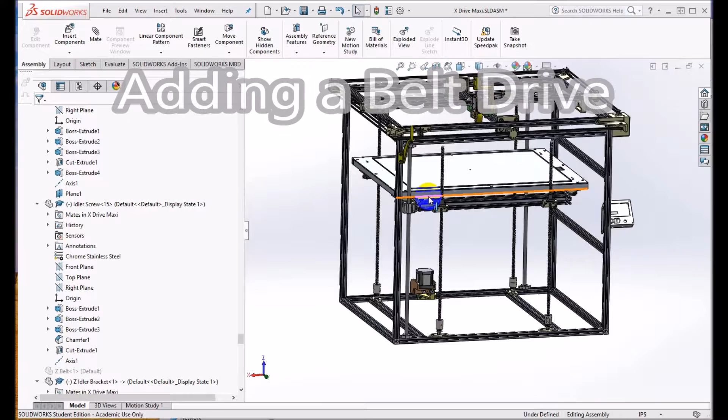In this video I'll be demonstrating how to add a belt, like a timing belt, to an existing machine. This happens to be a 3D printer. The method I'll be showing is applicable both to chains and belts. Alright, so let's get started.

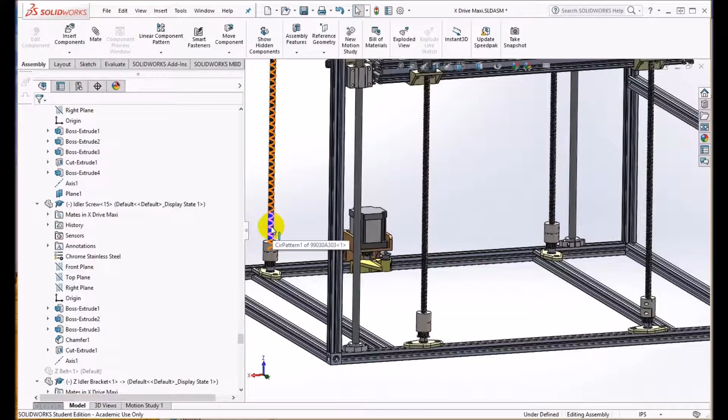I have a series of pulleys, each one at the base of a lead screw. Got 1, 2, 3, 4. Plus I have a motor and a tensioning idler. Formerly, when I wanted to add a belt using a very manual method, I would create a sketch. I would convert entities out to each pulley, do tangent lines and so on. It was a long drawn out process and not particularly easy.

Thanks to Paul Gwinnett, the TA in our junior projects class, I've become aware of this very nice feature. I'm not sure when it came into SOLIDWORKS, but it is there now in the 2016 version. So let's go ahead. I'm going to create a belt, a timing belt, that traverses this entire path, and then you'll see how I can adjust the length. I can measure the length, I can move the tensioner and have it automatically compensate.

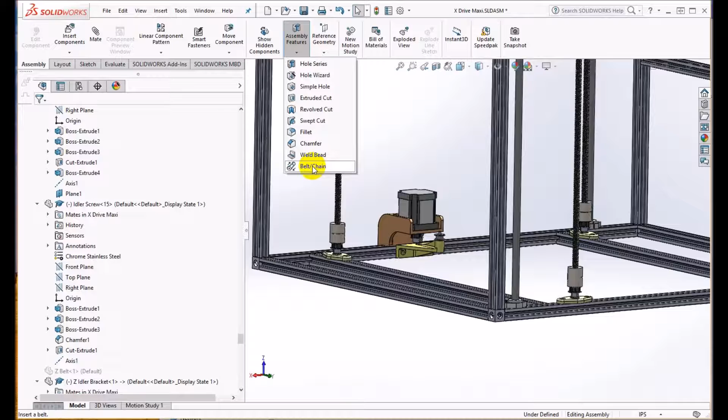So it's an assembly feature. So up on the menu bar you'll see assembly features. Go down to the bottom where it says belt and chain. And now it's wanting me to add what it calls belt members. In this context that means the pulleys. So I'm going to go to the first pulley and I'll click on the face of one of the pulleys. It creates a circumferential line in yellow.

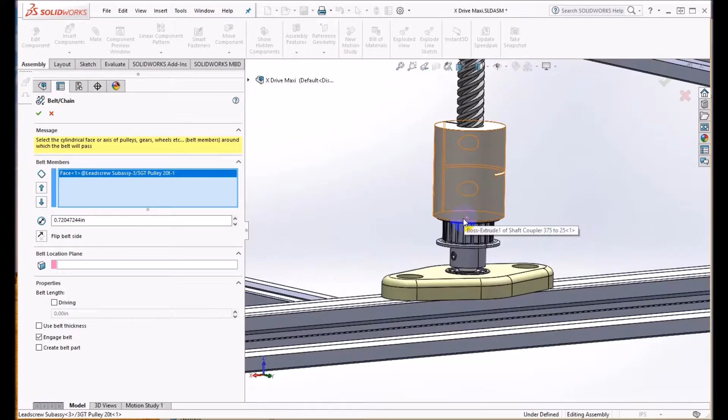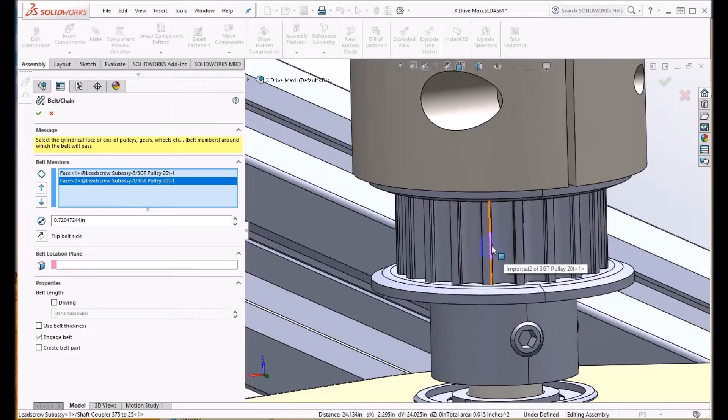I'll go to the next one. Now you must track around in proper sequence, otherwise SOLIDWORKS won't know where the belt goes from and to. So I'll go to the next pulley. You can see it's already created the beginnings of that belt. It's right now a very simple path. Let's add more elements to it. I'll go over to the next pulley, zoom in, click on the face. So now it's got a three-way belt system.

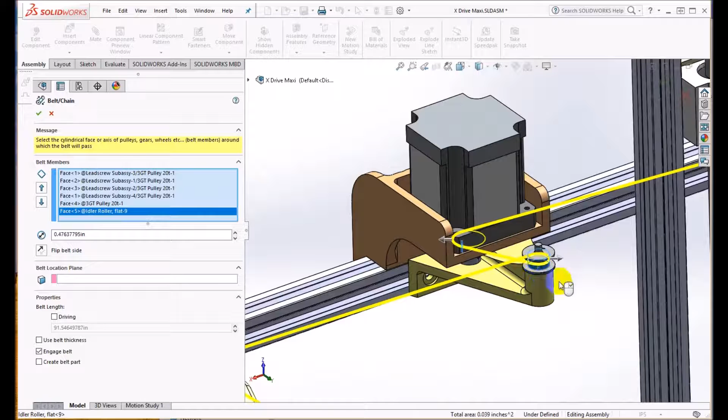Go to the next one, go to the fourth. We're most of the way there. Now I need to add the motor, the drive motor, to this. It has its own pulley. Click on that. So the only thing left to do really is to add the tensioning idler, which is over here, and you'll see, I'll do it, and you'll see how SOLIDWORKS takes its best guess at it.

It happens that's not how a belt works, but I do have the opportunity with this arrow to change the path to be more appropriate. So now I have the entire sketch of the belt travel. I do want to use a belt thickness. This will offset it a little bit from that face. My belt happens to be 0.03 inches thick,

and I do not want to engage the belt. The engage belt function, you may find this useful for animations. It allows you to turn one of the pulleys and have the belt actually appear to travel and drive the other pulleys. I'm not going to have that in this instance, but I do want it to create a belt part. That's a brand new part.

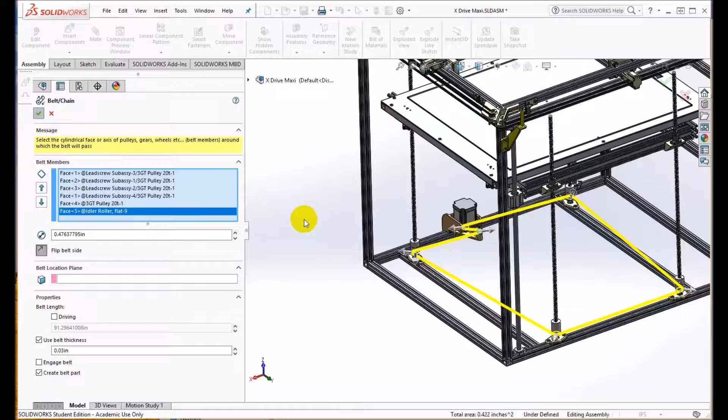So I'll click on that, and I think I have selected everything that I need. So I'll let it go ahead and do that. And what it will create is a sketch of the path. It's not actually creating any solids yet, but I can go in and confirm that the sketch, sure enough, does follow the path. The desired path goes from pulley to pulley.

There's nothing looped backwards. And so let's go down and look in the feature tree, and you'll see that this belt, this assembly feature, shows up at the very bottom. If I click on the right facing arrow, there's the actual part. This is belt 3. I can rename it. I'm going to do that right now. I'm going to rename the part to, I'll call this a Z-axis belt, and there it is named.

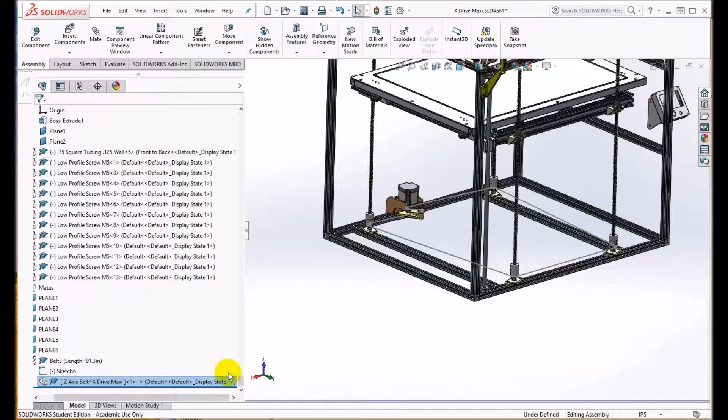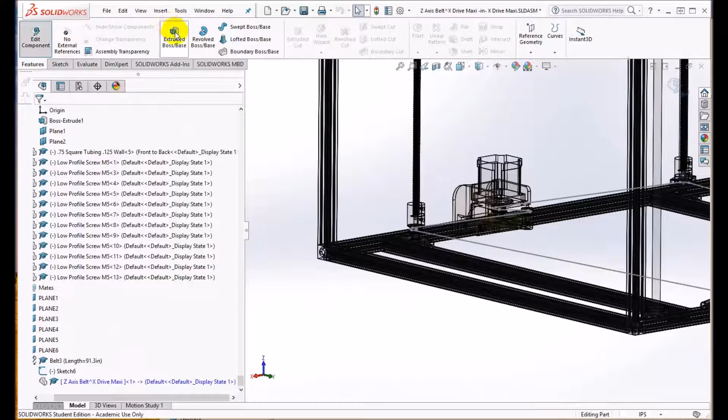Let's add some beef to it. Right now it's still just a disembodied sketch. So I will right click on this, go to edit part, and like with any part editing, I can add features, sketches, and whatever makes sense. So in this case I want to extrude with that line. I will select the line itself. It'll use the entire path.

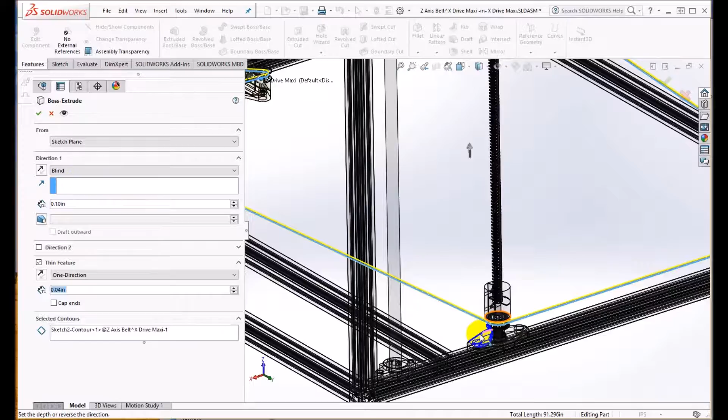Now the initial extrude, like one would expect, would be this weirdly shaped solid. No, what I really want is a thin feature where it uses that line and will create a thin extrusion that follows the path of that line. The thickness is okay at 0.04 inches. I think it copied that over from the creation. However, the extrusion itself, notice it's extruding up from the line.

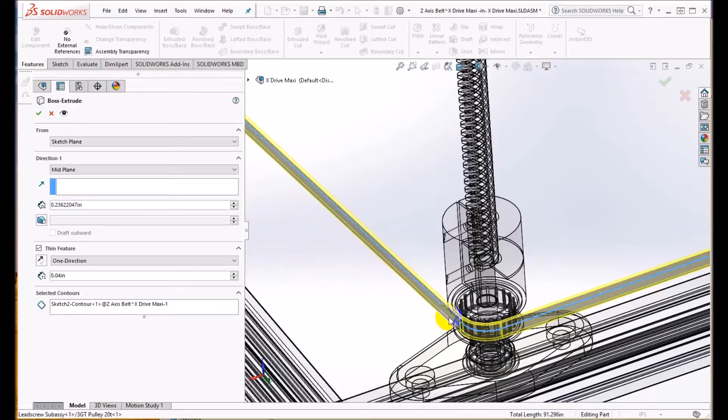I want to use instead a mid-plane, and I want to add the appropriate width of the belt, which happens to be 6 millimeters. You'd use whatever the belt you have instead. So there I am with a thin feature. It's 0.04 inches thick, and it follows the path of that line. I will accept this, and there is my belt. I will exit the editing of this part, and now it's shown up live in the assembly.

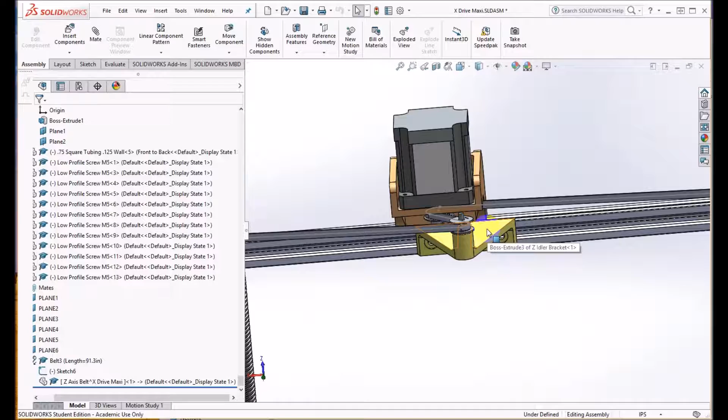Remember I mentioned that I have an idler, a tensioning idler here. I will move that and you'll see what happens. I'll move the tensioning idler, and initially the belt seems to not follow. That's not a problem. I'll go up to the rebuild icon way at the very top here, and it will re-establish a connection because I've told it when it created the belt that this pulley is part of the path.

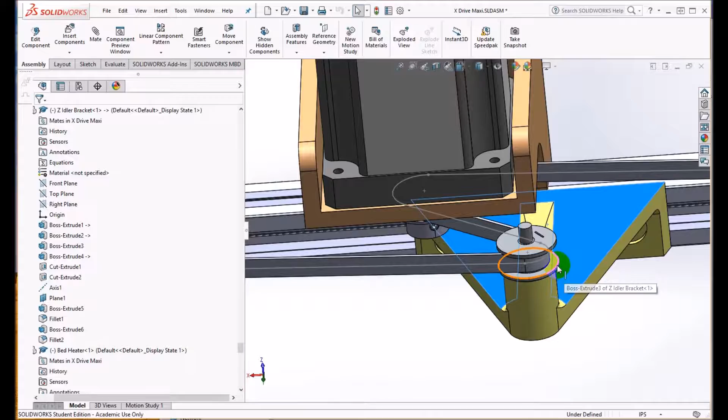Okay, so this allows me then, I can go back down, look at the belt, and it shows me the length right here of 91 and a little bit more, almost 91.3 inches. And then I go and start doing some shopping, and I find that there's a convenient belt. I'm going to bring one in here now as a convenient belt that happens to be 2460 millimeters, and you can run the numbers. That's a little longer, but you can't necessarily buy a stock belt with every possible teeth count. You have to find the ones that are available.

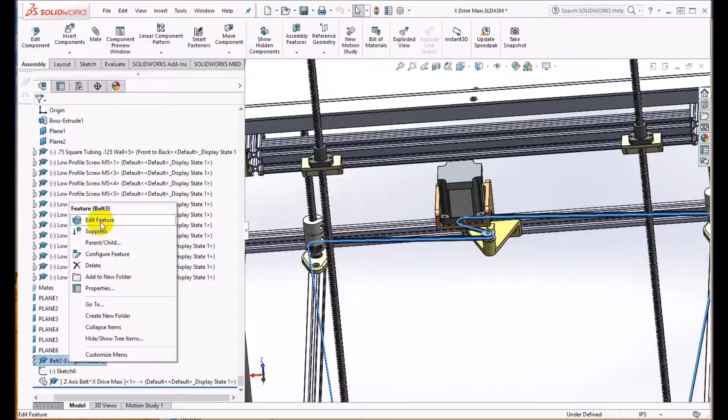This one, because I've already checked it, is a little long, and that's okay because you'll see how it takes up for it. So I'll go back into the belt. I'll right click on that, edit the feature. Remember I had a length of 2,460 millimeters. I will say that the belt length is driving the design. So I will type in 2460 millimeters. I will accept that, and you'll see it takes a moment to calculate, but it did the job.

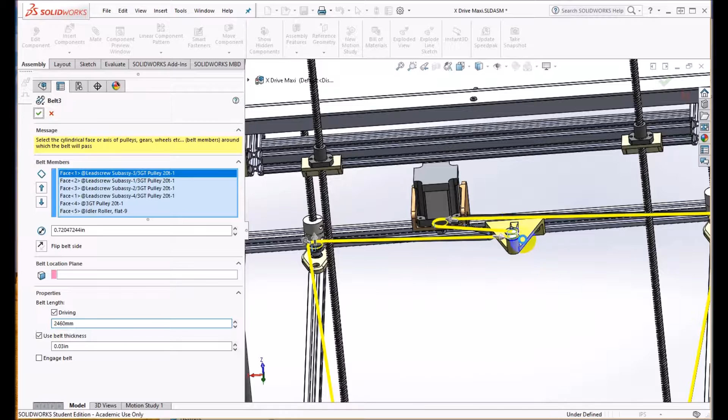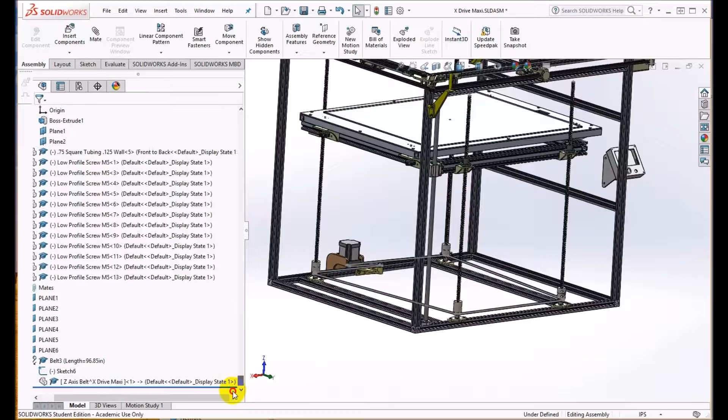It moved the tensioner as necessary. It shows me the new belt length, and I consider this an absolute boon because it makes it so much easier not only to draw the belt in place, but to determine what stock belt or what you should buy to complete the assembly.